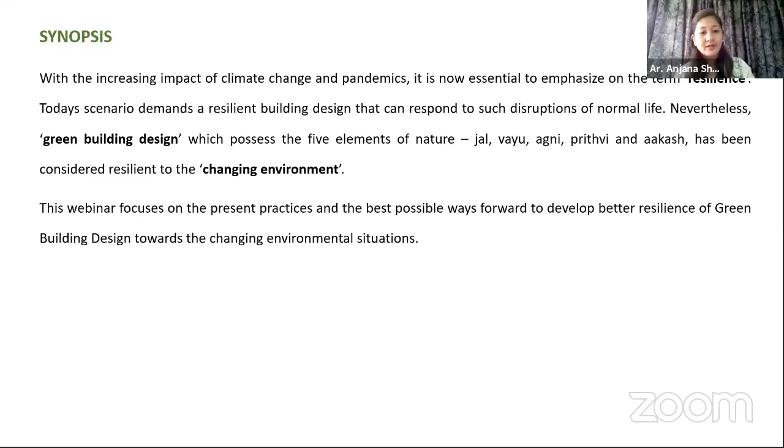So without any further delay, may I introduce our 3 eminent speakers. Believing that knowledge should be shared not only within the boundaries but also from outside our local context, we have invited today an international speaker, architect Tushar Sogani from India. Similarly, we have with us architect Ujjwal Manshakya and architect Saka Shrestha. So before beginning, I'd like to introduce our first speaker, architect Ujjwal Manshakya.

Architect Ujjwal Manshakya completed his Masters of Science in Architecture from Byelorussian Polytechnical University Minsk in 1985. He is one of the leading green practitioners of Nepal, working in his own firm, Innovative Creators, and has been involved in green building design for the past 2 decades. His popular projects are the office building of Butwal Power Company at Buddhanagar, New Baneshwor, Dwala Resort at Pharping, Tayo Eco Resort Hotel at Nagarkot, and the residence of Mrs.

Sushila Sakya at Maharajganj. Apart from the use of earth-air tunnels for heating and cooling of a building, his innovative design approaches are the use of solar air heating panels for heating buildings and solar chimneys for cooling buildings. Presently, he is involved in the Nepal Community Reconstruction Program, USAID, in the capacity of a team leader. So now let's zoom in to the presentation of architect Ujjwal Manshakya.

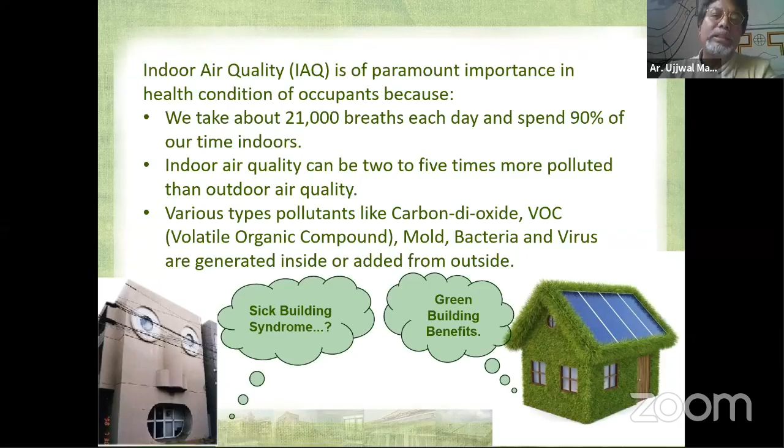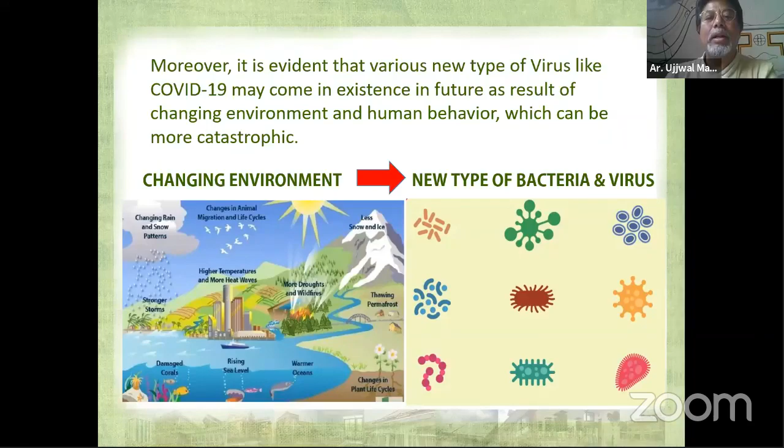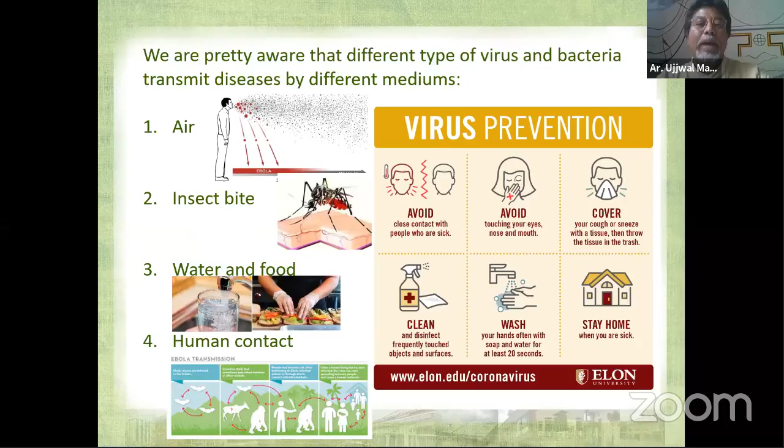Before, we used to save the lives of people, our clients, occupants, by properly designing earthquake-resistant buildings. Now it's high time that we design buildings so that the minimum people will get infected, get sick. With the change of environment and our human behavior, we are having new types of bacteria and viruses. And here we have to think that bacteria and viruses travel through air, insect bite, water and food, and human contact.

So it's to some extent controllable. Human contact, water and food, we can control those things. But air and insect bite are very difficult to control. And this is where our responsibility is. This is where the responsibility of architects is.

Now, we know that HVAC engineers design conventional or renewable energy systems based upon ASHRAE or ISHRAE with air change depending upon the function of the room. But here we have to understand that air change doesn't mean 100% fresh air supply. Now, all this pandemic is happening due to air problems.

Now, in green building design, we used to add 20% fresh air in return air, but that is too little in the present-day context. And if we add 100% fresh air in a conventional type HVAC system, it is going to be very, very expensive, and it's called an all air system. The all air system is very bulky, and its initial cost, operation cost and maintenance cost are very high.

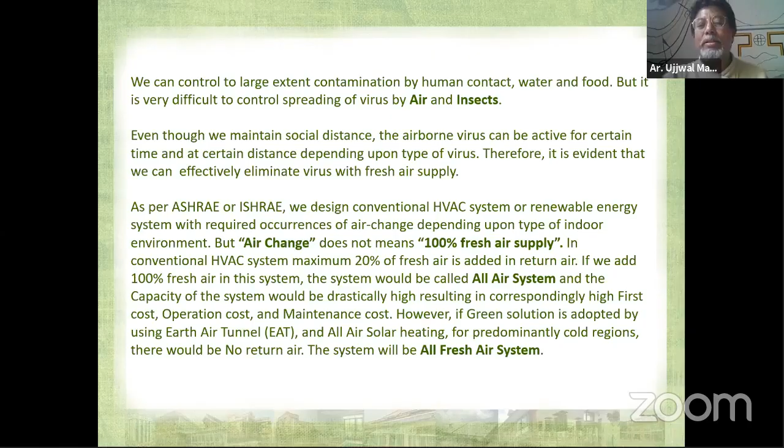Now, we all know that life after COVID will not be the same. There will be a lot of changes we have to go through. Similarly, we'll have to anticipate that we have to design HVAC systems with a different approach. Now, let us take an example. Let's talk about a very important building type, the hospital. And in a hospital, of course, the operation theater is the most important.

We all know that before, we used to have positive air pressure in the operation theater so that foul air doesn't enter the operation theater. And now we are thinking about having negative pressure so that fresh air will come inside, and the contamination from the patient or procedure will not travel outside the OT. That's the main focus.

However, in order to prevent the air from the passage outside the OT mixing during the opening of the door towards the operation theater, we will have to provide an anteroom so that contamination will not come inside. And we'll have to provide a special grill over there.

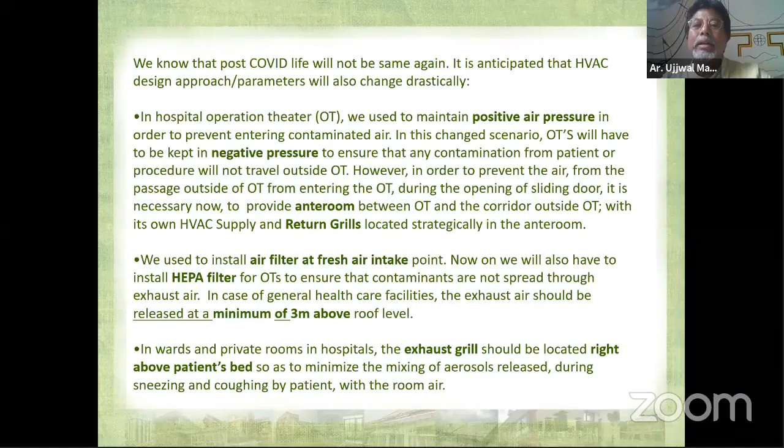So here we can see a typical all-air system where we can see a lot of machines, which require a lot of operation costs, electricity. And in green building design, there is only one blower, and it requires only a fraction of the energy. And in this system, we have an earth air tunnel and a lot of sunshine. And of course, we have got a lot of fresh air.

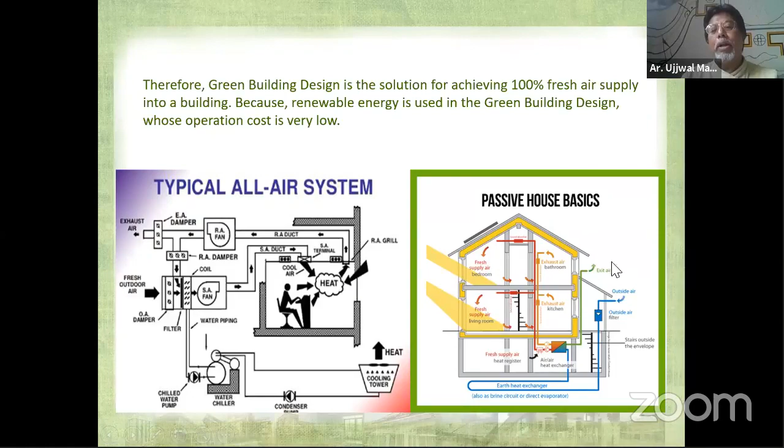Now, having mentioned all these things, we feel that we architects will have to provide the following things. We have to change our design approach. We'll have to provide space for more and larger ducts. We know that usually in Nepal, in Kathmandu, we don't have to provide ducts. We are not used to it, because mostly we are using split type AC with refrigerant through copper pipe.

So we have to design our building with a lot of ducts and provide additional space for filters. And we have to know that HEPA filters require more area than other filters. And we have to provide an anteroom, and we'll have to consider in depth the false ceiling so that we can run the ducts properly above.

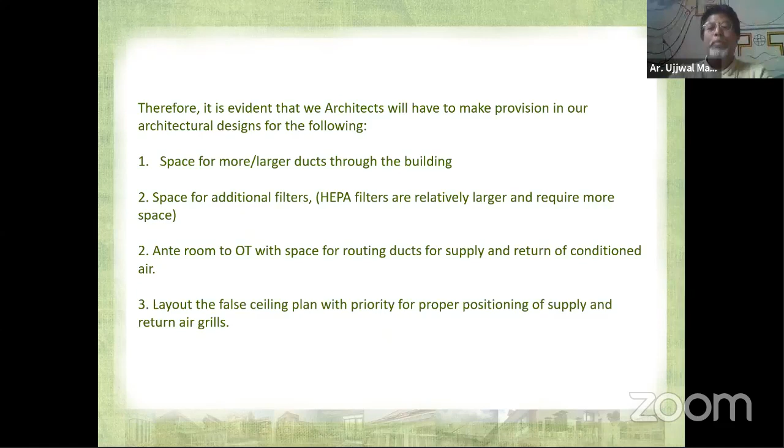Now, I would like to explain that in Kathmandu, we have really cold weather during winter, 2-3 months, and we really suffer. But we have a lot of sunshine all day. And my thinking is, why not use that solar energy for heating the rooms? And similarly, the earth air tunnel, which is excellent for the Kathmandu climate, we can use for cooling the building. And in both these cases, we can have 100% fresh air and make the building hyperactive.

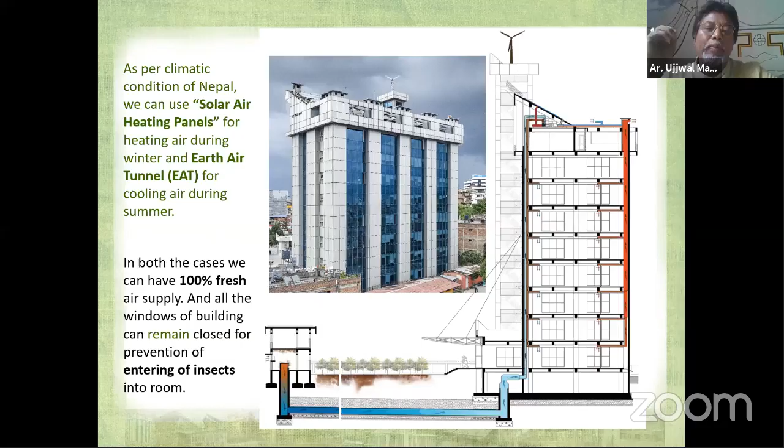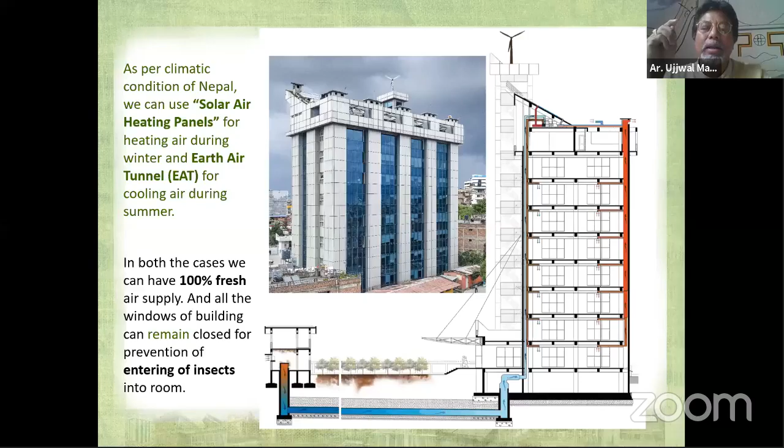Hyperactive means the building is closed, the windows are closed all the time. And it will prevent insects from entering. And once insects are blocked, we can control a lot of the spreading of diseases.

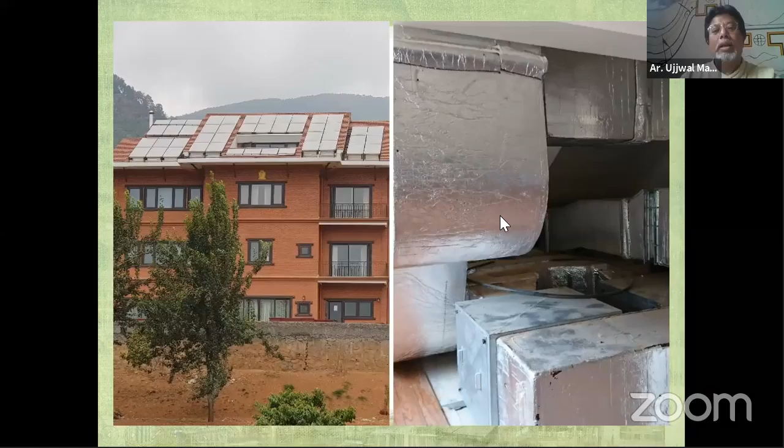Now I would like to show you how a small blower, you should be seeing it here at the arrow, can supply air from the solar air heating panels. And in this project, in the office, the air is exhausted out through the solar panel, and this system doesn't even require any blower.

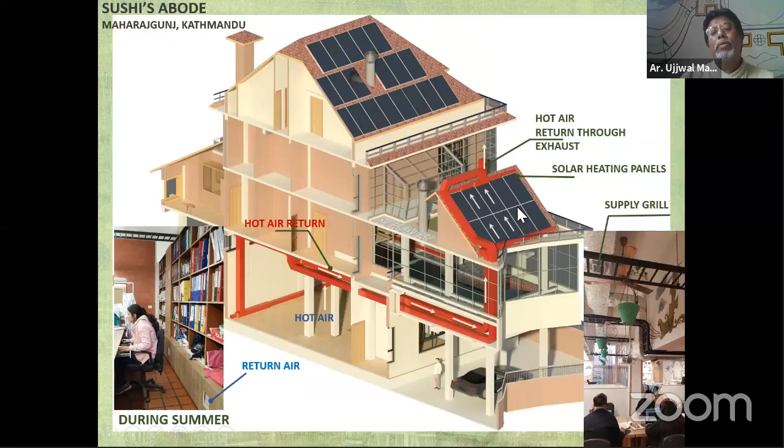This system works like this. The hot air is generated in the solar panel over here, and it will go out, and it will create some exhaust over here, a draft, and the air inside will be taken out automatically by itself.

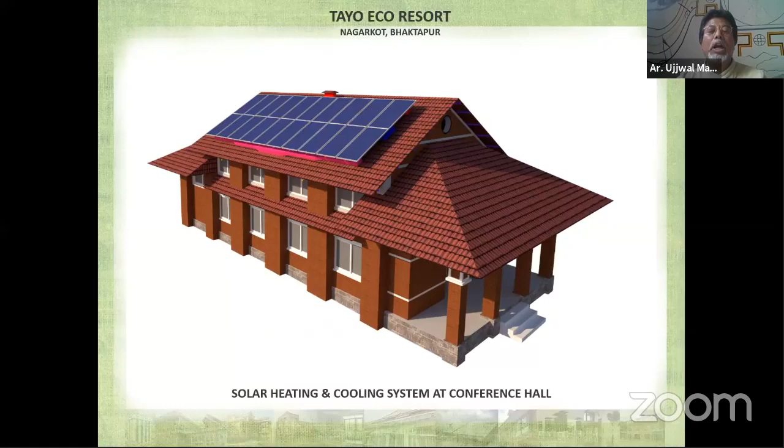This is my another project, and this is Tayo Eco Resort at Nagarkot. This is the conference hall. Now, here I would like to mention that this whole renewable energy system runs with a small, tiny blower. It's merely 800 watt, only 800 watt.

And I would like to draw your attention to the position of supply air and return air below. We placed this supply air over here so that hot air will not be stagnant above where we don't need it, and we don't need fresh air over there. This is how we design, and these small things really matter.

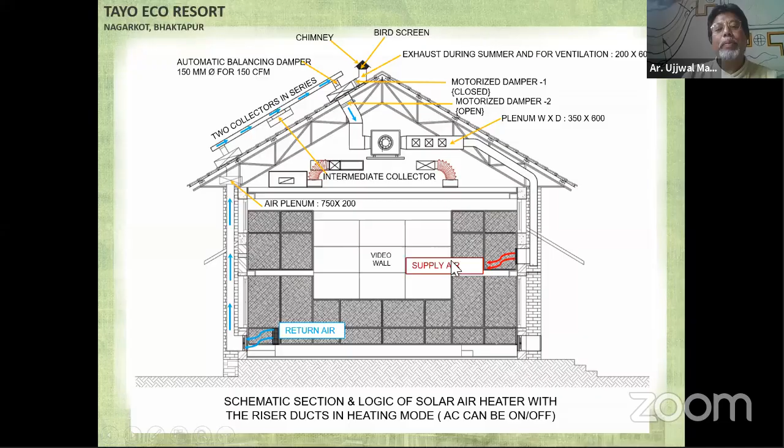And this is the section for winter, and the solar air is heated over here and is blown by the blower to the conference room. And this is summer mode. In summer mode, we have hot air generated inside the collectors, and it will go out from the chimney, and it will create a draft in the conference room, and the pleasant air of Nagarkot will enter into this building through this filter.

So in this case also, we are spending a minimum amount of energy and money. Yes, sir. Okay. A gentle reminder of the time. Okay, thank you. I'm going to finish it. Okay, so this is how it works.

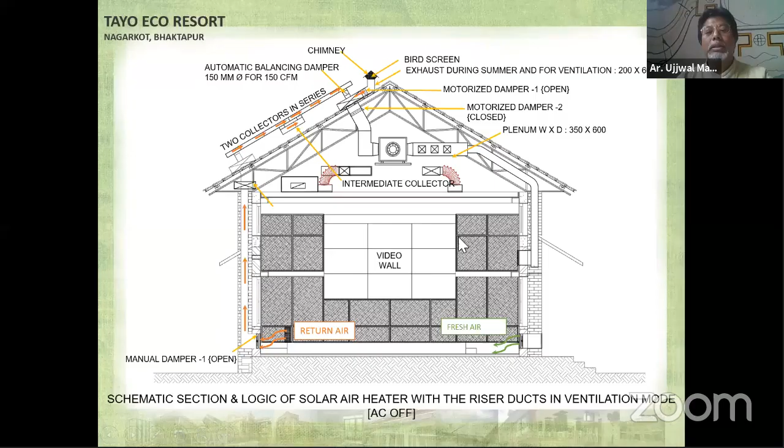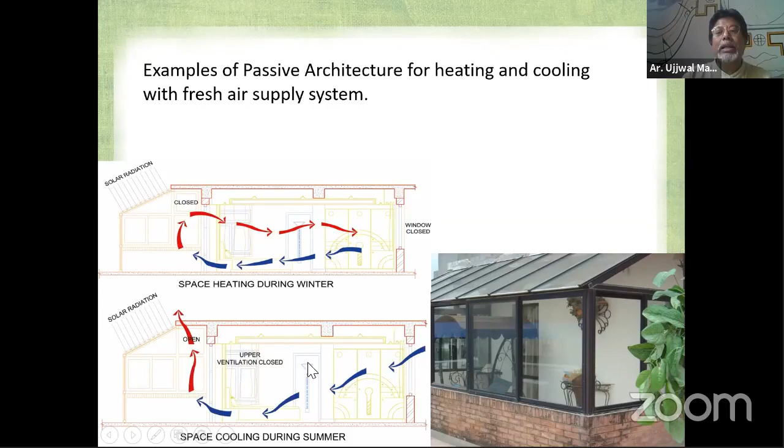And I would like to show you some examples of passive architecture. In this project, I have used a solar space for heating during winter, and during summer, the hot air over here will go out through this ventilation, and a pleasant breeze is created inside the room. Now, this is my project using solar chimneys for cooling the building, not heating, but cooling.

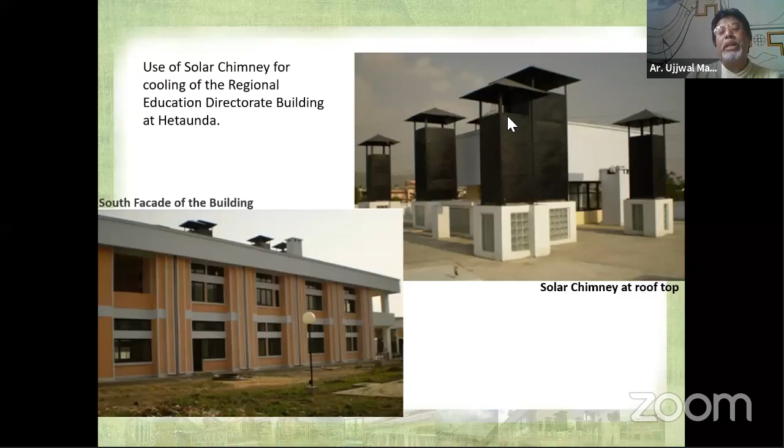So in this project, I have designed these solar chimneys such that during early morning when there is sunshine, the air will be heated inside these black painted chimneys and it will travel up. And here I have provided cooling space at west and east side of the building. And once the air moves outside, it will create a draft system inside the room.

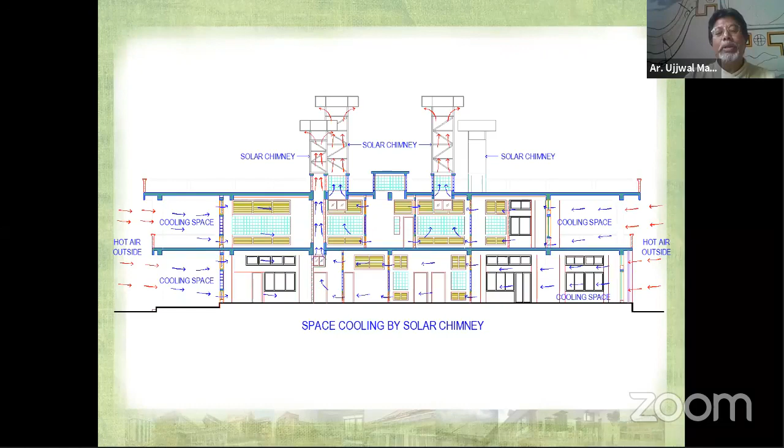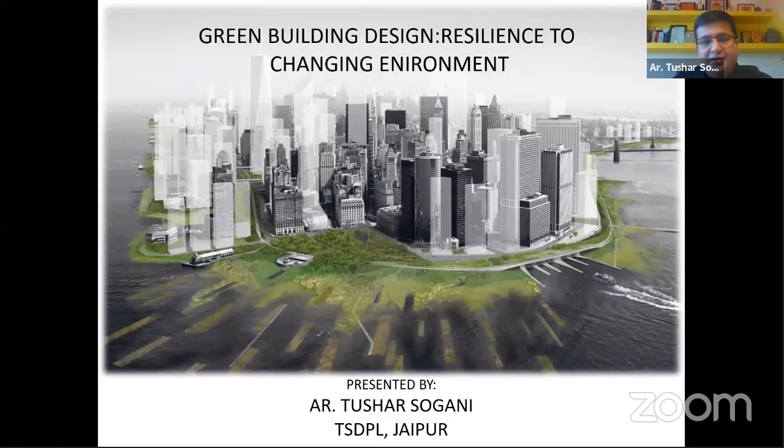Now, as the topic of this entire webinar is green building design, is it resilient to the changing environment? Of course, yes. No one can say no to that. So now let us analyze what are the reasons behind it. Now, if we just try to guess the benefits of a green building, it can be basically bifurcated into three parts. First is the economic benefits.

The overall cost of a green building is less as compared to a normal building, though there are a lot of myths that green building is always costlier. In times to come, if you design, as architect Ujjwal mentioned, if you really use passive measures in your design, you will finally end up in a more cost efficient building, and green buildings are always comparatively cheaper. So we have got the economic benefits, and moreover, when the building is constructed, the operational cost of the building is comparatively very low, as he showed in his presentation.

Now, second is the environmental benefits. What are the environmental benefits? Green buildings are basically inherently designed to make the best use of natural resources. A green building is always much friendlier to the environment than a normal building. Now, what are the social benefits? Green buildings are very good for the health of the entire ecosystem that occupies it, and they also decrease the load on the local infrastructure. These are the three very basic benefits of a green building.

Now, since we know that a green building helps us, it is resilient towards the changing environment which we are facing nowadays. A lot of climate change is happening. So how is a green building resilient?

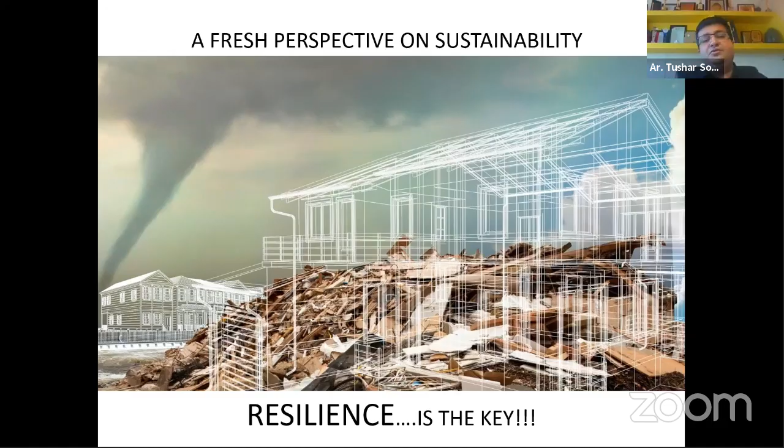Now friends, we come from a common culture, India and Nepal. In India, we always talk about the 5 elements of nature, and since Hindu mythology, they are very instrumental in creating any built form. These 5 elements are air, which we call Vayu; fire, which we call Agni; water, which we call Jal; sky, which we call Akash; and earth, which we call Bhumi. All these elements are very important.

And if you respect all these 5 elements in your design, mark my words, your building will have a much longer span of time. It will be resilient to any climate change in the world, whatever pandemics or natural calamities we are having, mark my words, it's going to act like a very good screen. So we have to respect these 5 elements of nature.

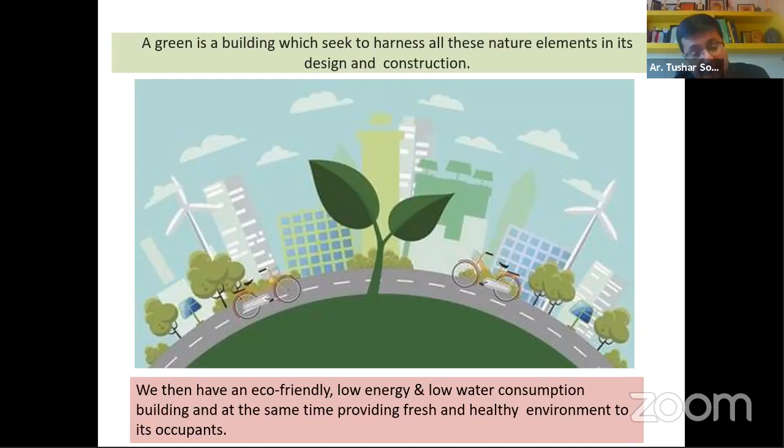Now, actually, a green building is a building which seeks to harness all these natural elements in their design and construction. And we have to be very eco-friendly in terms of low energy, low water consumption, and all these 5 elements play a very important role. A building which comprises all these 5 elements of nature is actually a true building.

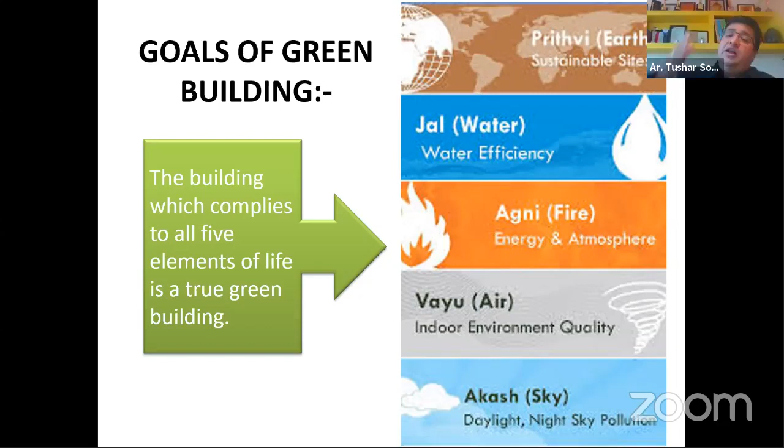If I talk about India, if I talk about Nepal, if I go to the countrysides and see my old vernacular architecture, my regional wisdom teaches me a lot. They all have honored, they all have respected all these 5 elements of nature.

Now I am going to discuss the 8 design principles. My presentation will not be very theoretical - I believe in displaying more and more slides, more pictorial things, which gives a better understanding. As Anjana said, I am fortunate enough to have a strong legacy with me for the last so many decades.

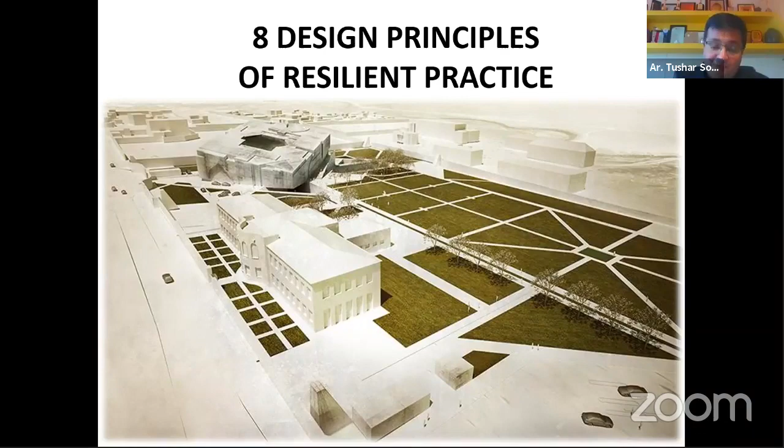Mark my words, my city, Jaipur, which was planned in the year 1726, is an example of very good living heritage. My entire city, all the built forms, are actually very resilient to the changing environment. My buildings, planned in 1726, can withstand the ambient temperature of 48 degrees in today's world. So I'll give you an example.

Let us discuss how the green building responds to this climate change. This building uses very low carbon inputs - this is Alsisar Haveli, placed centrally in Jaipur. The materials in this building are wood and stones, all low energy input masonry, which are very appropriate for the building in responding to climatic change. So this is one example.

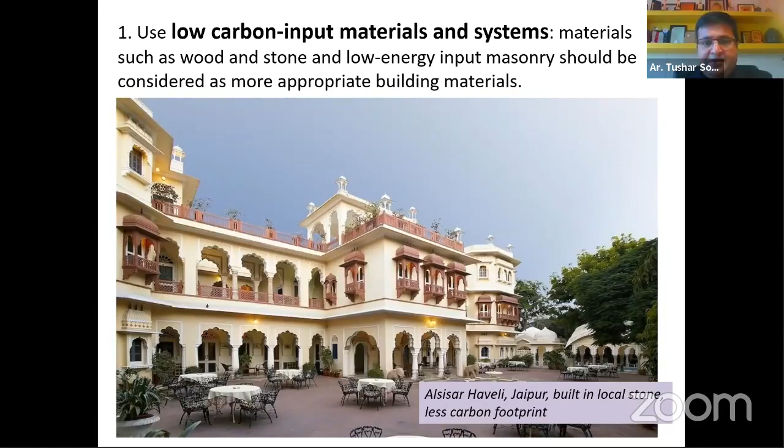Now another example is Hotel Suryagarh. I talk about this project very much. This was not designed by me - it was designed by architect Ravi Gupta, who is a very senior architect from Jaipur.

This building has responded to the local climatic condition, and basically it has followed all the green principles, and it has preserved our traditions, not because of the facade, but because of the functionality.

This was the only building in Rajasthan in the present era where none of the material was procured from more than 50 kilometers radius. And all the laborers who worked on this building and gave it this built form were from a radius of only 100 kilometers. It's a fantastic piece of architecture.

And the structure should be designed to be highly energy efficient and include the use of insulated building envelopes.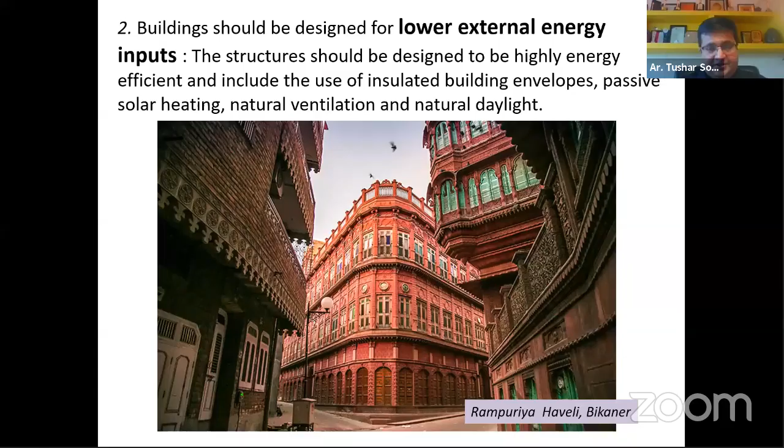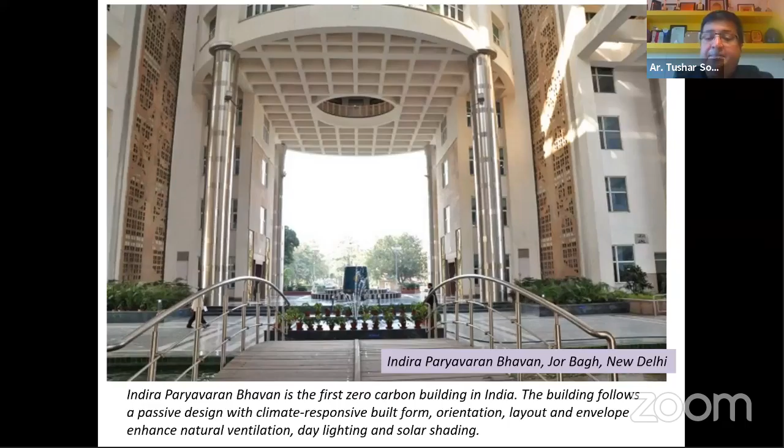This Indira Paryavaran Bhavan is the first zero carbon building in India. And this building followed a totally passive design with climate responsive built form.

The orientation was fantastic, and the layout and the envelope enhance the natural ventilation, daylighting, and solar shading.

In the last presentation by the speaker, we learned what role natural ventilation plays, when he was explaining a hospital, in the present scenario of COVID. What is the essence of natural ventilation?

Everyone has realized that whenever we wear a mask for a longer period of time, we start feeling suffocated. The same thing happens when we live in a space that lacks natural ventilation.

The building should be well lit by natural light and natural ventilation, and as he mentioned, we have to use certain other sources of energy like solar energy. So this building is a good example of passive measures of creating a green building.

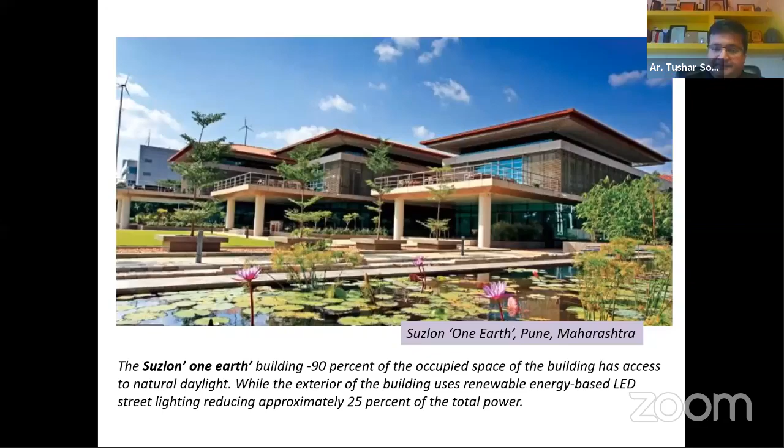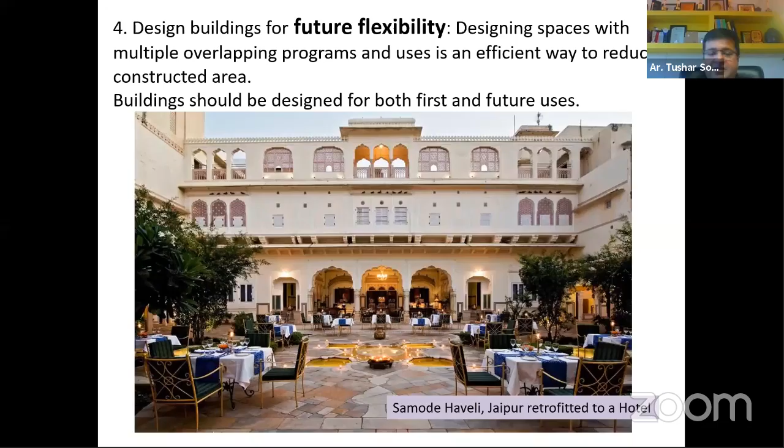Whenever I give a slit window, the air transforms from a high ambient temperature; when transferred through the slit window, the pressure changes, and finally you get a cooler breeze. So there was a logic behind everything. My ancestors were very smart, very witty people, though they were not educated by a degree in architecture. The kind of knowledge they had to respect nature, to incorporate the sustainability principle, no one can ever forget that.

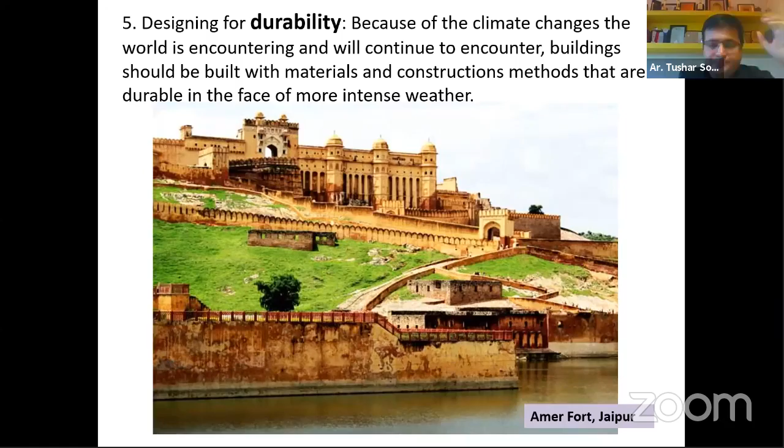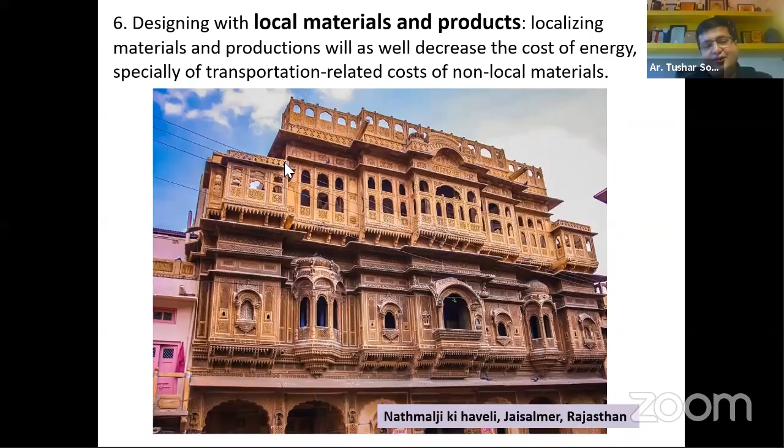Now this is another beautiful building called Nathmalji Ki Haveli, and this design was basically done with local material and local production, which thrust on localizing materials and production. This decreased the cost of energy, and especially the transportation-related cost of non-local materials, which is now the need of the hour. As I said earlier, after pandemics we talk about trying to use only materials within our domain, which does not add huge logistic cost. They were so witty, so smart enough to think of all these things two or three decades before.

Now, if I talk about the Havelis of Rajasthan, all of them are planned on a similar concept, and every one has a very holistic approach towards sustainability design. The courtyard is basically a cohesive space, then the slit windows, jalis, jharokas, the modern and older materials they used to have - everything was planned holistically. So Havelis of Rajasthan always have comparatively much lower energy consumption as far as operations are concerned.

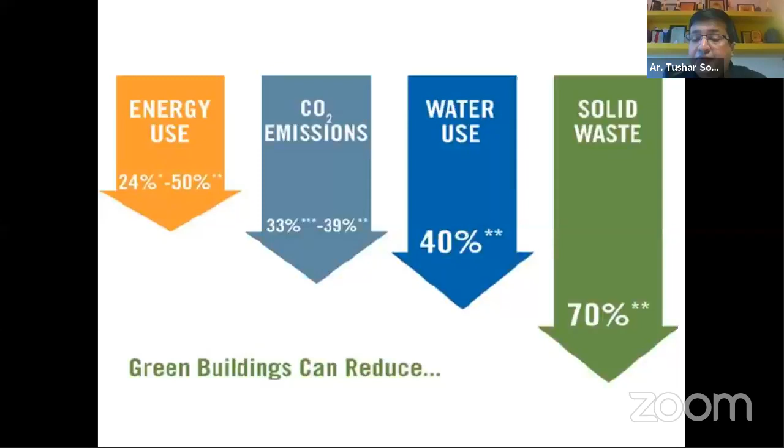So if we have a green building, and if we follow all the 5 principles and harmonize them in our design, it makes my building very resilient against all the odd conditions of nature. Nature always teaches us something at some period of time: you human beings, mankind, please be aware, don't confiscate my space, don't take my space. That's why we have seen a lot of things happening in this lockdown period; nature has given an alarming call to us. We should really now judiciously follow it.

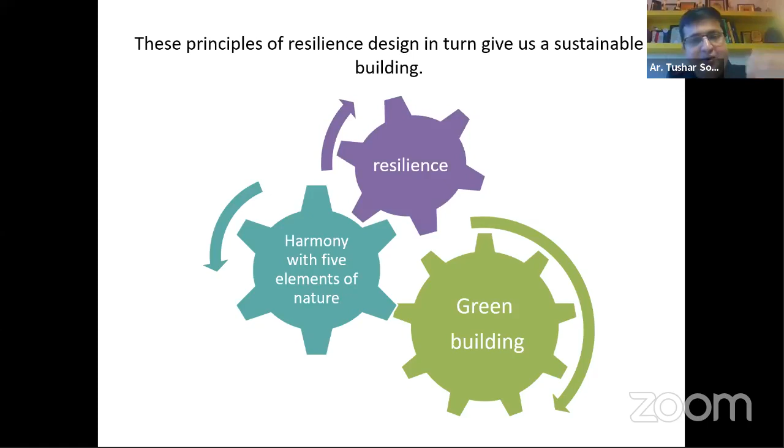And I think it's high time that we should pay respect to nature. And this, we being architects, can do very easily. We can follow all the design principles right at the drawing board stage, and give a good example to the entire world. So last but not the least, let all of us go green, not in terms of getting a building rated through some rating agency, but go green by a very holistic approach followed in our designs. And I think there cannot be a more auspicious platform than this, where we are talking about all these things on World Environment Day.

So I think we need to think about 4 R's. We always see reduce, reuse, recycle, but now it's high time that we should actually rethink the entire thing. Thank you so very much. Thanks a lot.

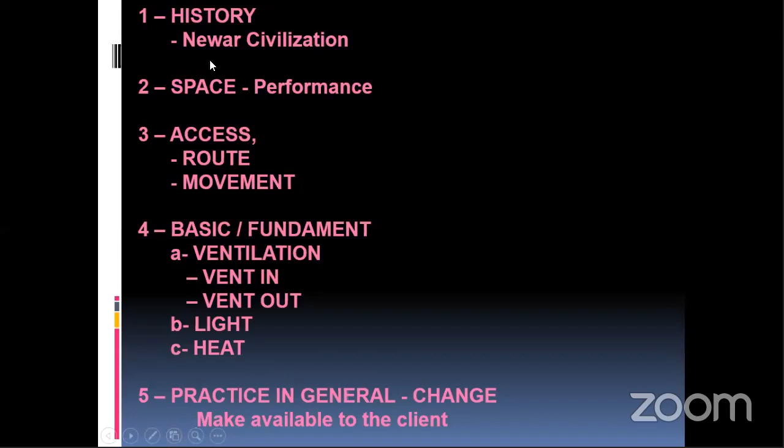How they used to inform people that these areas are actually infected: they used to put a long stake with cotton balls of crimson color. I think it's about lack of information, sharing, and continuing the practice among the generations. Only now, with COVID, do we realize social distancing, self-isolation, quarantine, all this, but it had been in our history.

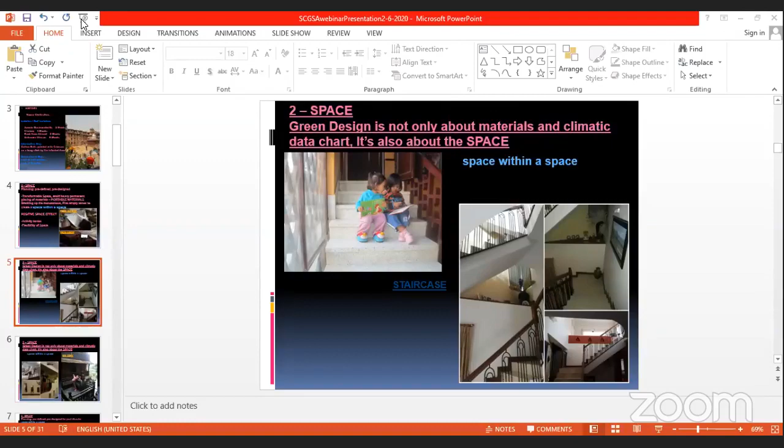While we design space, I think it has to have a value of giving yourself a new energy boost. It pleases you. And the space has to be easily convertible to anything. Staircase. Just look at this picture, the lights coming inside, the ventilation, and the freedom to come and sit.

Excuse me, sir. The voice is still cracking. Do we have a microphone or headphone that we can talk through? I'm on the microphone. The voice only breaks while I listen. Okay. Okay.

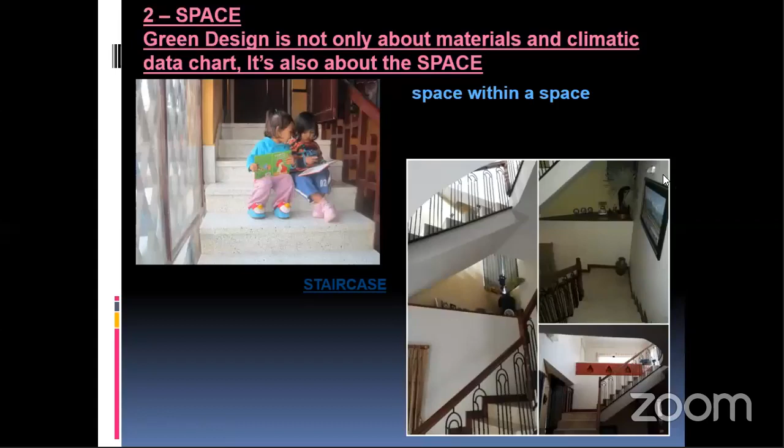Space. While we are planning, even a wall inside the house, you can convert it to full spaces, right? For example, look at the photo on the left. There's a story on this little half wall, right? How the airflow is balanced, light is balanced, and how the punctured void spaces can give them happy moments, create a story within a wall.

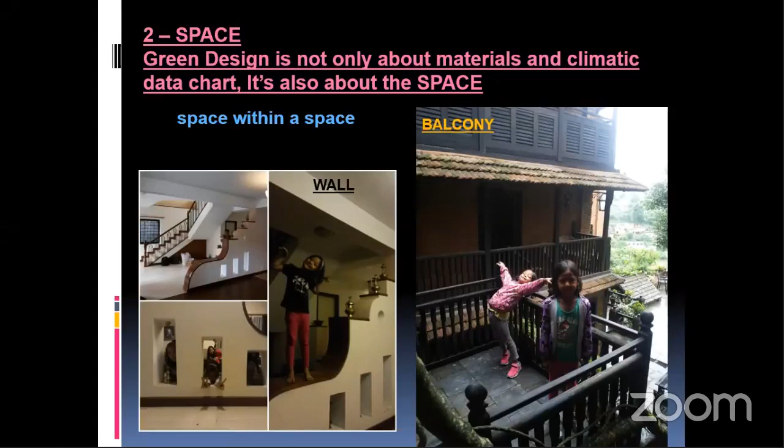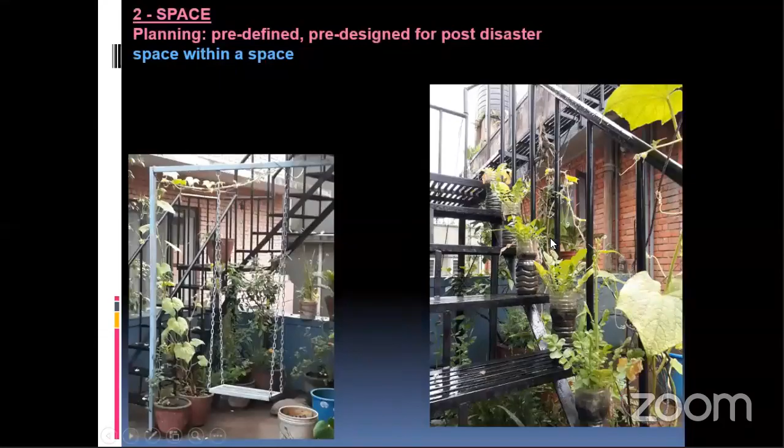There's a balcony. Actually, because of land prices, people have to put balconies and take benefits out of them. For example, during the pandemic, I think everyone must have seen what happened in Spain. They were using balconies to interconnect with each other, have fun, and all these things. So, yes, we can create another space, greenery and all these. I'll just go quickly through this. See, look at this picture.

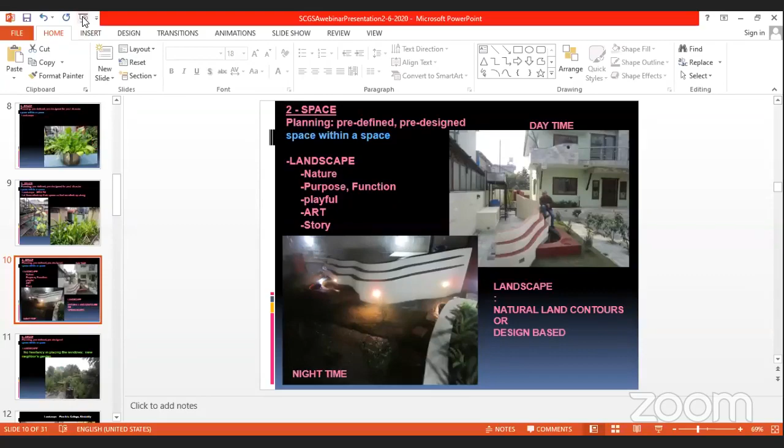For example, if you see in this photo, this is a story. This is a small pond. This is actually made for the birds to come and have a drink. So this is the day time and this is the night time. So in every time of the day it changes our moods. It gives us different feelings and all these things.

And the point is, if we don't have the opportunity to have our own greenery, it's okay to view the neighbors' garden too, with our window openings to them.

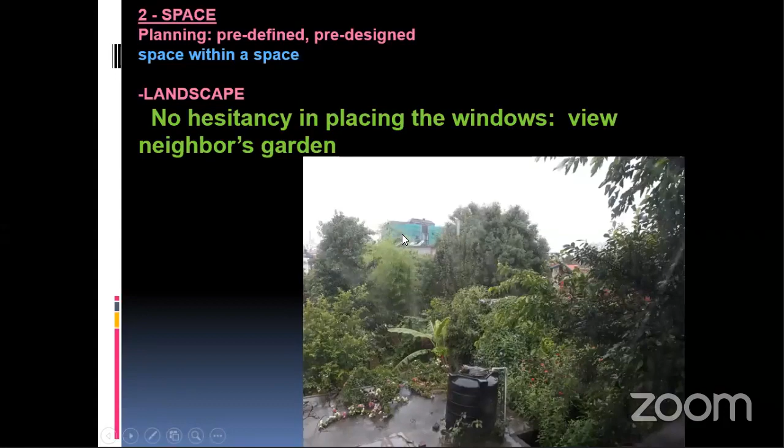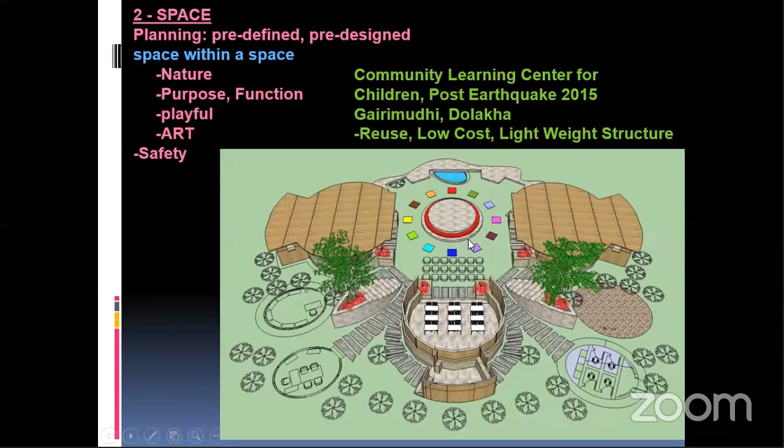I'd like to share a little of this project here. This is a community learning center for children after the 2015 earthquake in Gairimudhi. We used reusable material after the earthquake, and it's very low cost. Here's the concept. The main concept was how to keep the psychology up.

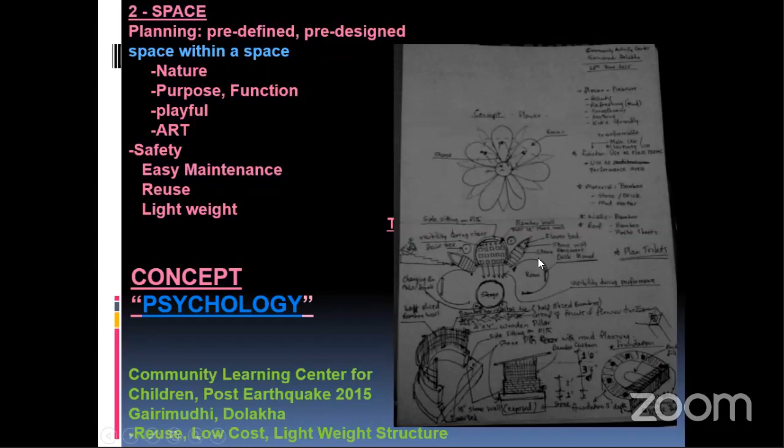To love flowers, and the flowers have their fragrance, their beauty, the softness of nature. With this flower, up to this part, we started thinking about these low-cost structures. We started using bamboos and all this. This is what we came up with. The flowers, right? This is a stage performance here.

So for performances we can just rotate this and have a view on the space.

Excuse me, sir. You have 2 minutes more time.

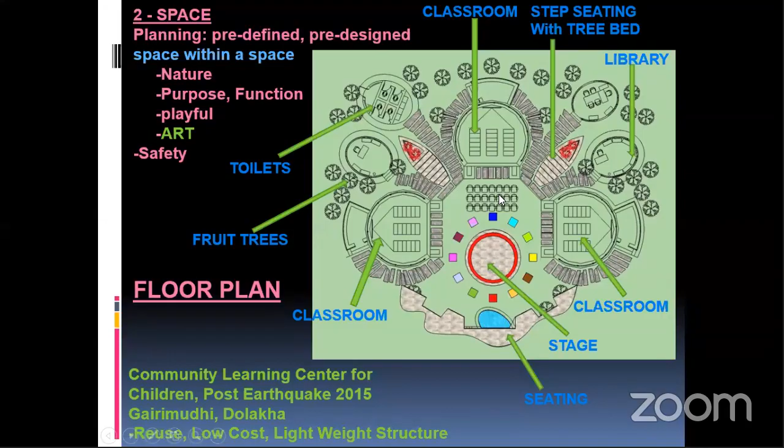The classroom, and the main psychology is that the children talk about their school and have pride in it. If you see this, these are the bamboo roofs. I'll go quickly. Another is how we can make it stress-free from threats and panic attacks, how we can cope. I'll just go through it. This is a school. This is a cultural one.

So the thing I wanted to say is about movement and routes, how they affect us. Not only the pandemic, right? In Nepal, like 85% of hospitals, hotels, all these don't have emergency escape plans for fire and earthquake. This gives us very big mental stress, right?

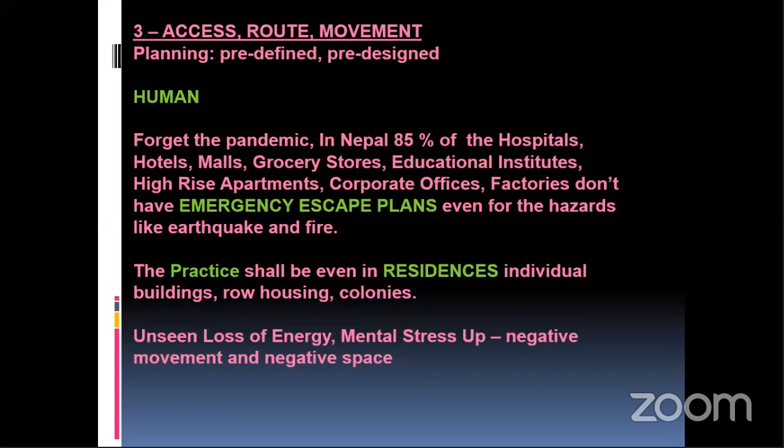One of the hospitals I've seen has their laboratory between the emergency and the OT. If you take a seriously ill patient through the lab, there's a much higher chance of getting infected. So you have to consider that also.

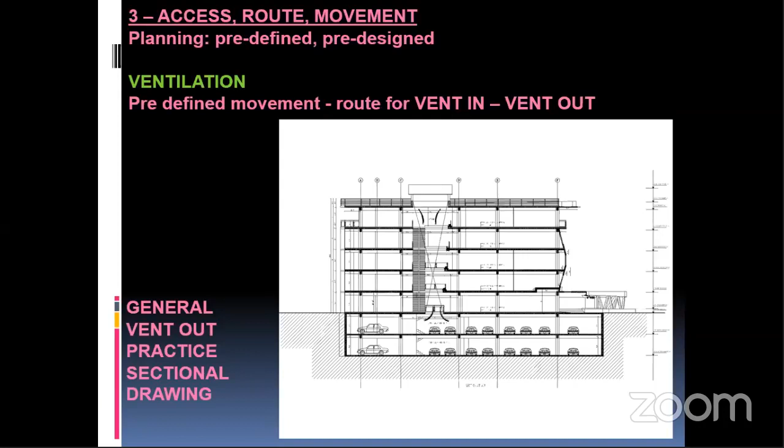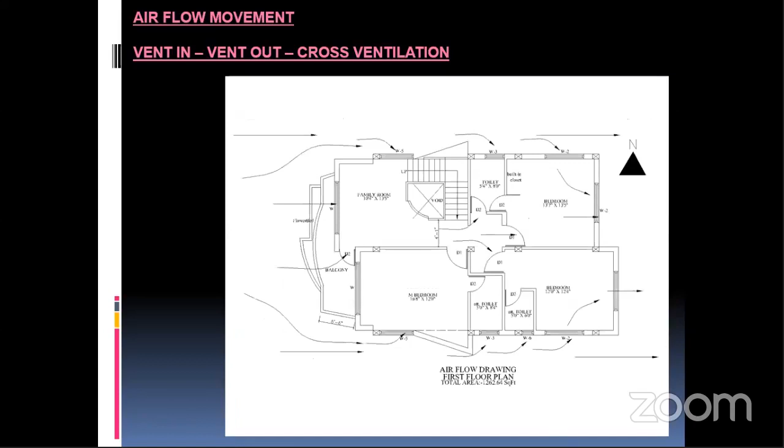A very common practice comes with ventilation. Don't only consider vent in, vent out through the staircase well, taking the airflow above the staircase well. We have to be very considerate regarding cross ventilation. If you follow the arrows, simple like this, openings have to be able to air out the inside and circulate the air through, which keeps your building fresh all the time.

When we design a building, we have to consider this very much. We cannot just rely on the 4 sides, south or east, of the site. We have to consider all 10 sides, the ground and the sky, right? Sick building syndrome: if we don't consider it, there's the pandemic that comes every few years or so.

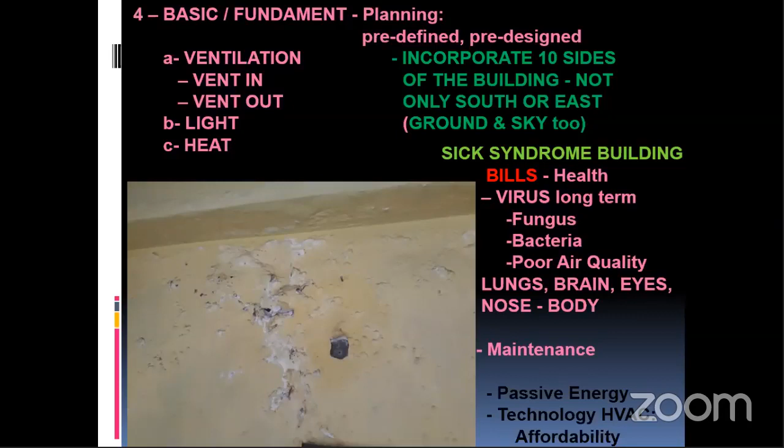Already 15 minutes, so I'd like to request you to conclude, please. Yeah, I'm just concluding. I think I lost so much time, so I had to do it quickly. Thank you, Anjana. Anjana ji? Hello? Can you hear me? Yes, we can. Anjana ji?

Okay. Great. So I think we should conclude. Your voice is breaking up too. The sound is, I think it's not only me, but I think even your voice is breaking up. Hello, Sagar, can you hear me? Abhishek, I can hear you, but I cannot hear Anjana and others. All right. Anjana, are you there? Yes, I am.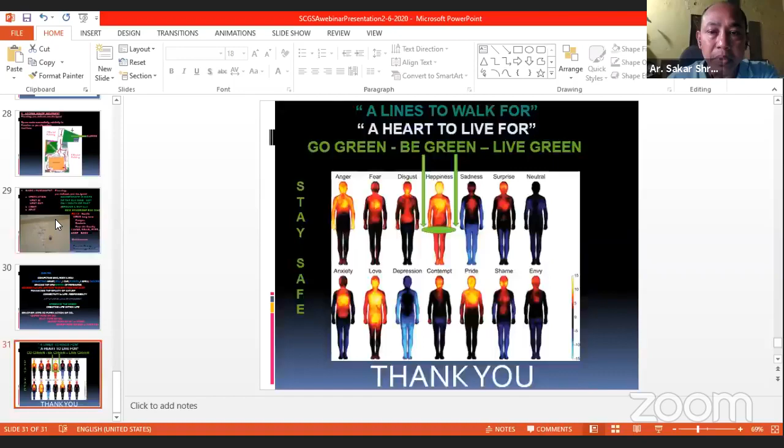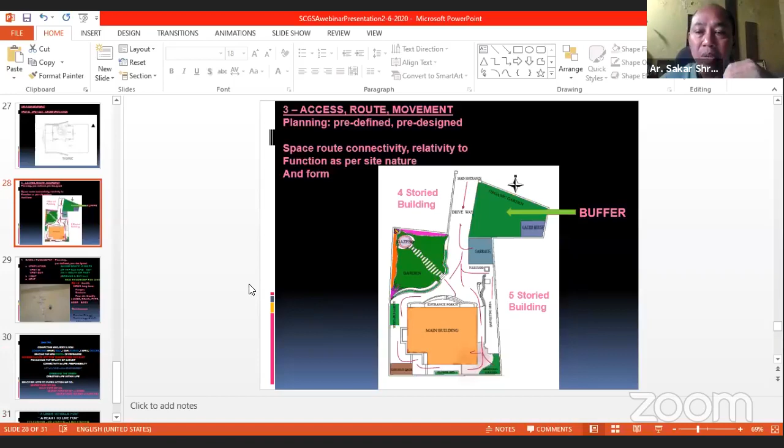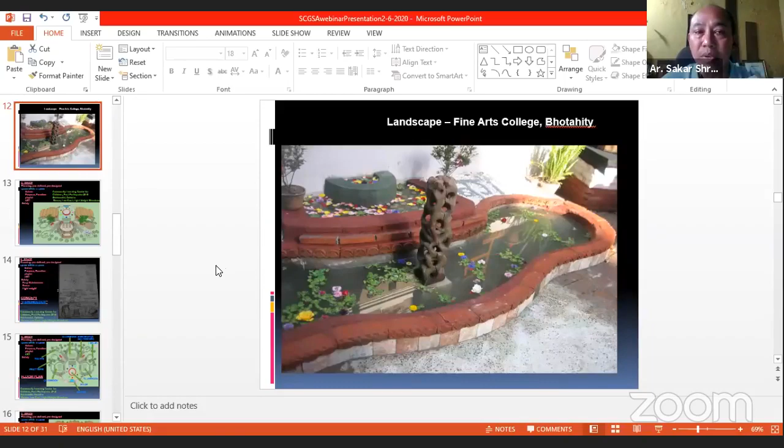So we have to, with clients, not only for this pandemic, but for earthquake, fire hazard, regularly give them the drawings of what can come up. So if this kind of hazard comes up, then please follow this drawing. We have to make that practice. Otherwise, people will just haphazardly run around. There has to be the flexibility of space, routes, defined spaces, all this. And if you practice that, then I think it doesn't have to change. That is the only change that we have to make. Practice. Okay, thank you.

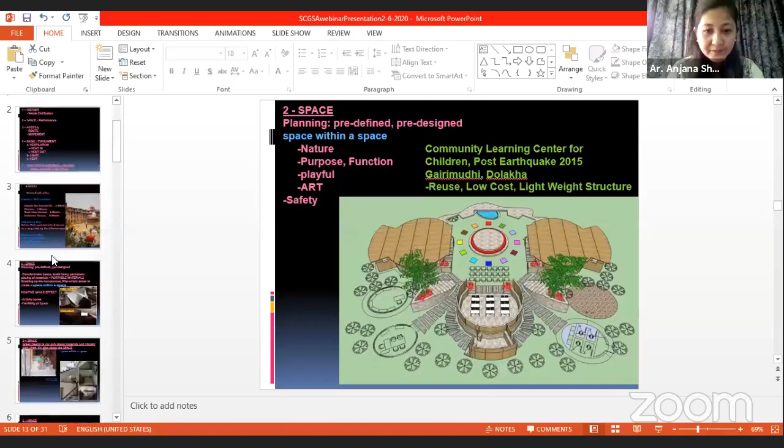So next question is to Ujjwal sir. The question is, in your projects, you have so many interventions by a mechanical or energy engineer. Could you please explain how you work in collaboration? How do you resolve idea clashes? Also, how does an EAT work just below the parking lot in the Butwal Power Company building? Won't the heat generated by the vehicles turn around the expectations? Okay, it's a very interesting question.

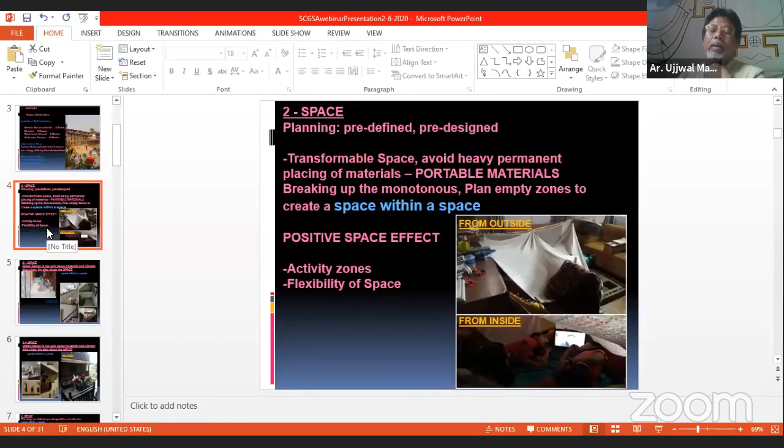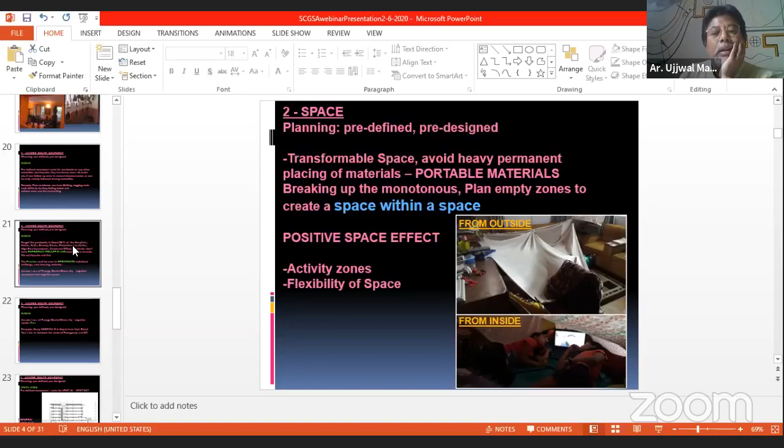I take every project as teamwork, teamwork with the HVAC engineer, sanitary engineer, electrical engineer. From the very commencement of the project, we do teamwork. And regarding another point you asked,

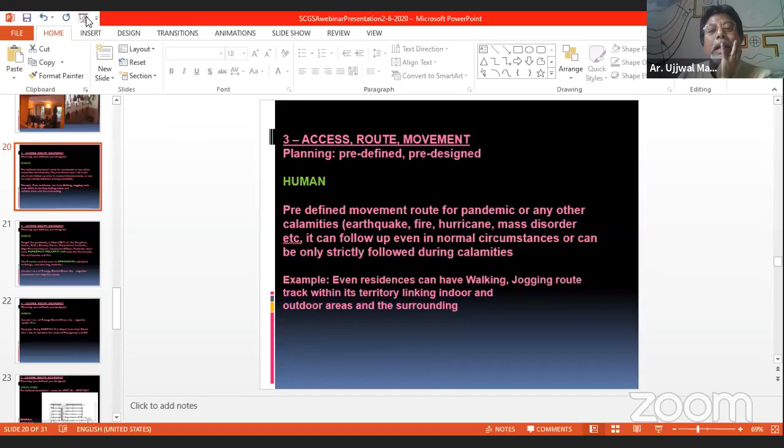the issue regarding the EAT below the parking lot. Actually, it was there in the design phase. The EAT was below the parking lot. Now, when actually constructed, there is no underground parking. So it's just about 5 meters below the surface.

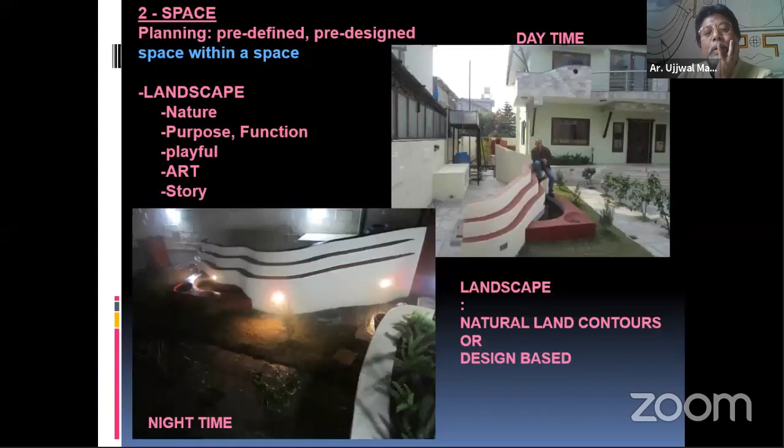Anyhow, even though it's below the parking lot, it won't matter, because the intake of the EAT will be somewhere outside, and we provide an air filter for the air intake. So air will travel from the air intake through the air filter, then go down where there is no contact with the structure over there, maybe a garage or maybe some store, it doesn't matter. So it will travel to supply and distribution.

Okay, thank you so much. So the next question is to architect Tushar Sogani. The question is, can you please elaborate a little on the passive design ideas for the Havelis that you have talked about? Well, I think this is the most appropriate question, which I always like to answer, because I have witnessed this in my entire upbringing. I've stayed in Havelis. Very good question.

Actually, when these Havelis were planned, they didn't have any active measures. They were planned on the basis of totally passive measures. I'll jot down a few points. What were the passive measures? Indoor air quality. In fact, all my Havelis were planned as per Vastu. Every space was given to a particular area because of the wind flow at that time. The toilets were placed in the northwest corner because of the wind. So this was one passive measure of doing things.

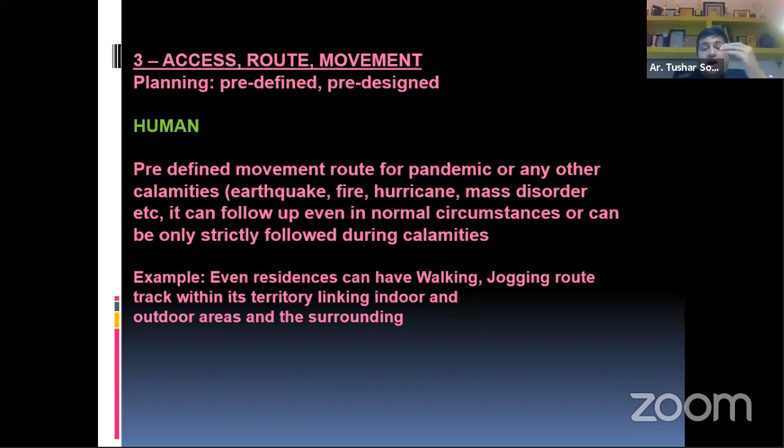I talked about proper indoor natural ventilation. There were slit windows to support that. Whenever there's a pressure change, you get good natural ventilation. Plus, you get better quality air also. My Havelis very smartly played with water. They used to always store rainwater in the tankas or in the reservoirs, and later they used it. It was a passive measure.

In all the Havelis, the entire Haveli was planned on the basis of the courtyard system. There were courtyards in the center because of social cohesiveness and also climatic reasons. It was a passive measure. And moreover, the usage of materials were all passive measures. They used to have thicker walls and lime plaster. So all of the Havelis in the walled city of Jaipur, since it was constructed in 1727, were following passive measures in their designs, which are still lasting long, still having a positive impact on the people living in those areas.

Okay, thank you. Another question: the participant hasn't mentioned the speaker's name, so any of you can answer this. The question is, it would be fantastic if we can build sustainable green buildings, but the solutions are too expensive for big plots. How can we design in compact settlements and smaller plots, as most of the plots in Kathmandu are small, 3 to 4 annas? So would any of you like to answer this? Yeah, I would like to answer it.

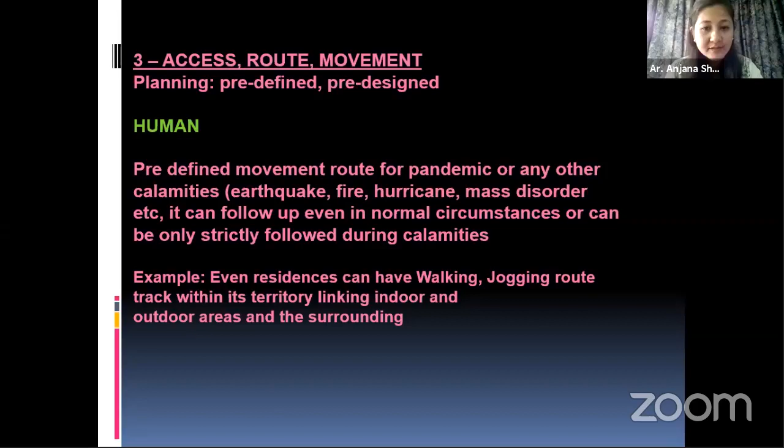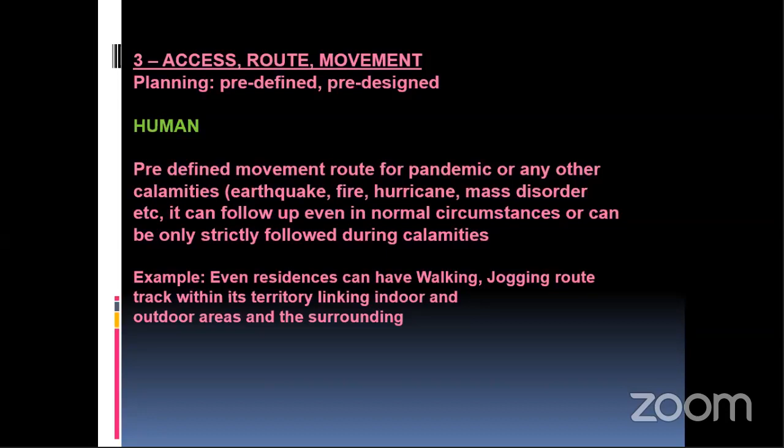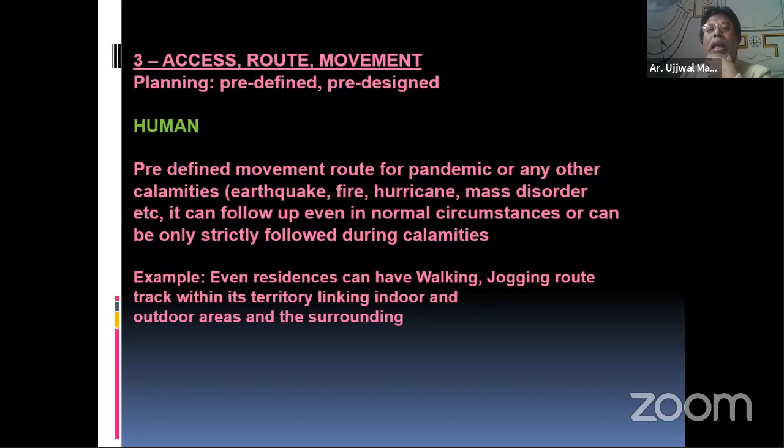Okay, it's no problem to design green buildings for small plots, and we know that the size of the building doesn't matter. It is not compulsory that a building should be big to be a green building. We can achieve green building design through many options. And as long as we are not going to apply for a rating system, we can choose whatever fits the budget and is appropriate for that site. It's not a problem.

And in the Kathmandu climate, as per my experience, we can use solar air heating panels. If the plot is small and there is a lot of shading from adjacent buildings, then we can have a solar air heating panel at the roof, and we can even have a solar panel on the wall, to make the building comfortable.

And making a building green is not only renewable energy, it's energy efficiency. We can make the building energy efficient in many ways. And in Kathmandu, our traditional green brick, which we call kachiapa, is also excellent for achieving comfortable temperatures inside. There are so many things we can do in small buildings also.

I would like to add something. It's not about the size of the building or the site, it's about the mindset also. As the land price of Kathmandu is so high, people tend to forget that they have to live green and take care of their health, just like I mentioned in the green buildings example. They ignore the long-term effect just to get enough space for more people than required to live there.